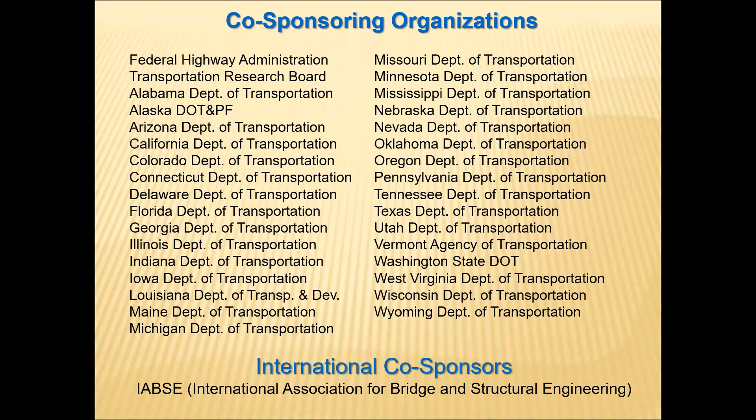We also have the IABSE as a co-sponsor of the conference. We are very delighted to tell you that we have two congressmen who are good friends of bridge engineering and very much involved with transportation, members of the committees on transportation. They're confirmed and will be with us, sharing their thoughts and making some remarks during the conference.

The welcoming group also includes Carmen Swanwick, the chair of the AASHTO SCOBS. And we are also delighted to have a speaker from US DOT, Firas Ibrahim, a very good bridge engineer himself, to provide us some of his thoughts on ABC and so on.

We also have several keynote talks with speakers from around the world, providing us an opportunity to learn from the latest developments in ABC in other countries. You can go to our website and see their names, titles, and affiliations. We have speakers from Switzerland, Sweden, China, Germany, England, and Holland.

We also have select keynote speakers chosen to provide not only to us in the US but also to the rest of the world, information on what we do in the area of ABC in the US. You see their names here; they don't need any introduction by me. There are 8 US keynote speakers in total, as you see here.

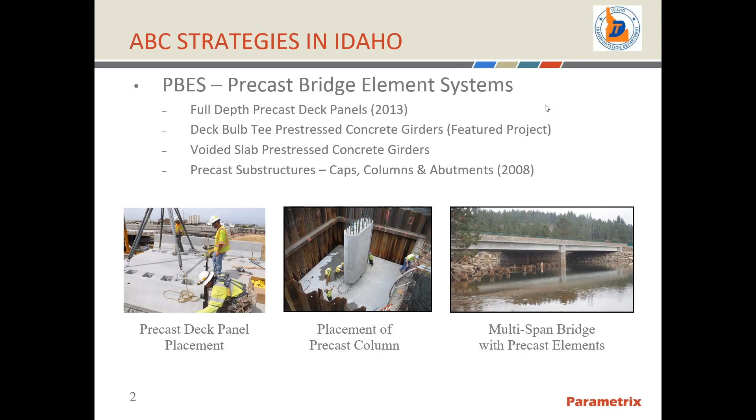In 2014, we did our first bridge slide. That was in a design-build contract, followed up with another bridge slide in 2020 on I-84, which was a design-bid-build contract.

Also in 2013, we utilized full depth deck panels. And finally, we recently piloted a project for construction with the use of steel I-girders with cast in place concrete deck in segments, and those were cast off site, and then we craned those into final position and connected them with closure pours.

In summary, Idaho has been using ABC concepts for about 50 projects that we have had underway. Idaho's use of ABC has been very positive, and we will continue to use ABC as a tool in our toolbox.

I'd like to introduce Shane Brown from Parametrix. Shane is going to talk about the State Highway 51 bridge over the Snake River. Shane's firm, Parametrix, and Shane were good enough to join us on the design of this project. And Shane, take it away.

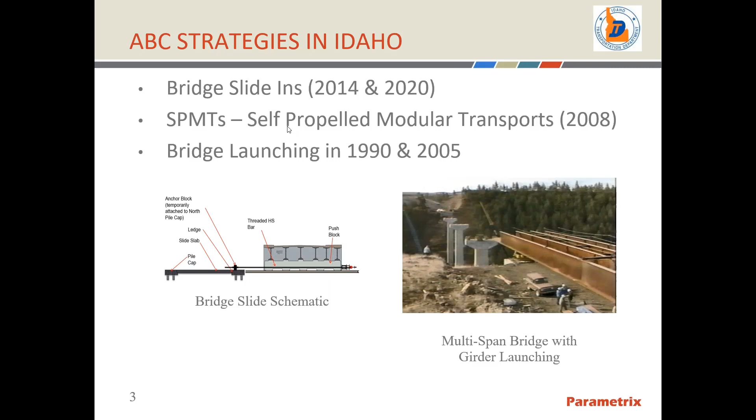Thank you very much, Matt. I'd also like to thank ABC and UTC for this opportunity to present our featured project for today. So today we're talking about the State Highway 51 over Snake River Bridge. I'll give you a description of the project, design challenges, the solutions to those challenges, some details on the superstructure design and substructure design, and then also what everybody likes to see, the construction.

Contributors for the project included the people you see here. ITD did the majority of the roadway civil design, and also did the early design and TS&L to select the type size bridge replacement we're talking about today. ITD hired Parametrix after they did the TS&L to complete the design and take it all the way through PS&E. American Geotechnics was the geotechnical engineer providing the foundation design. Forrester and Associates provided hydraulic and scour design. The contractor was Cannon Builders, and the precaster was Forterra. Lafarge Ductal provided the UHPC for the connections. Nucor and Skyline provided the steel pipe piles that we'll be talking about today. HLE was the contractor's engineer who did all of the construction engineering. Western States Rebar provided reinforcement, and of course FlexiFloat, which you'll see their product being used here, provided the barge used during construction.

The project was the typical design bid build project with 6 bidders. The low bid came in around 6.8 million, with the high bid coming in around 8.8 million. The contract was set up to have 299 calendar days to complete the work, with liquidated damages of 4,100 per day.

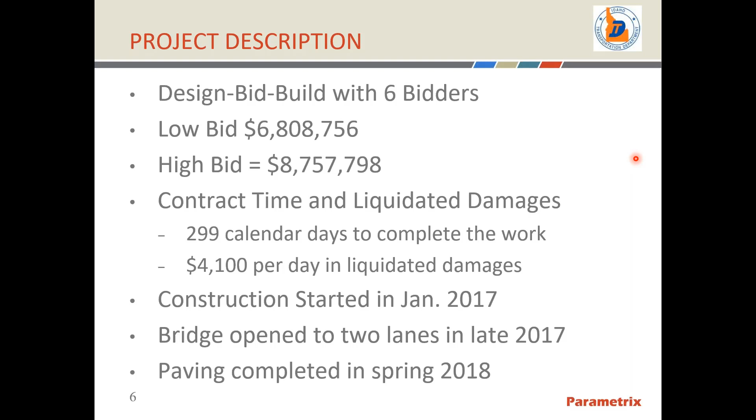Construction started in early January 2017. The bridge was opened to 2 lanes in late 2017, and paving was completed in spring of 2018.

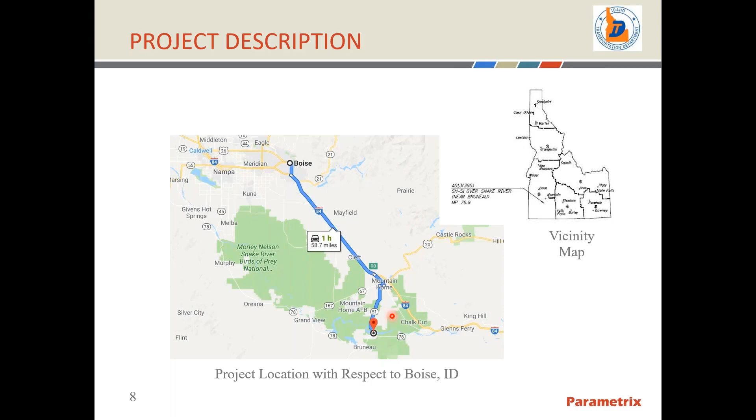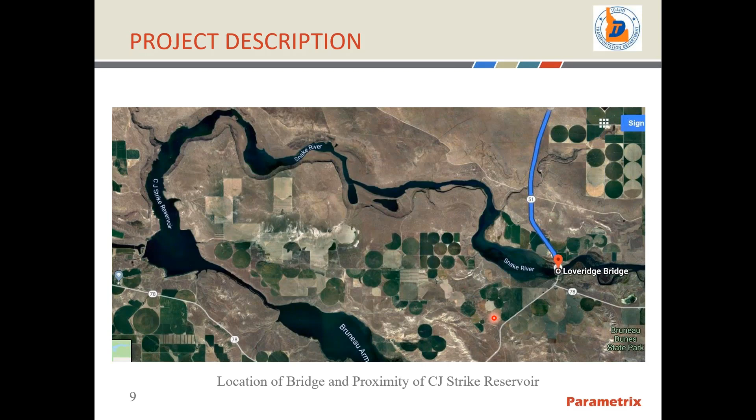In this photo, you can see State Highway 51 runs north-south across the river. This is the Snake River. There's a reservoir here, CJ Strike Reservoir, with the dam right here. The bridge is actually just in the eastern limits of the backwater from the reservoir. Also nearby is the Bruneau Dunes State Park, a great place for recreational people who like to play in dunes. And as you can see, lots of agriculture in the area. So State Highway 51 plays a valuable link, especially for agriculture, a lot of product that needs to get to market.

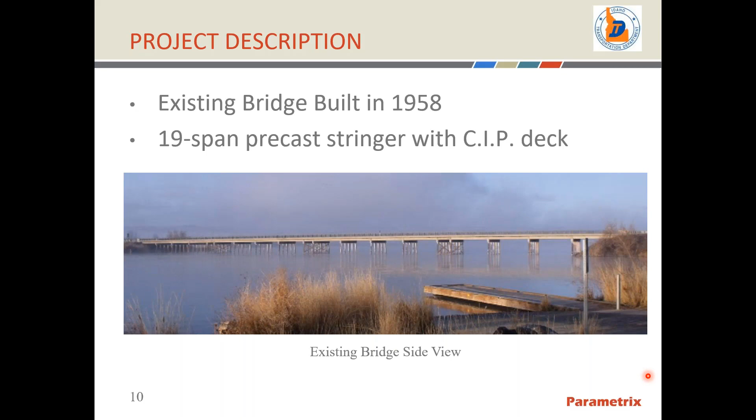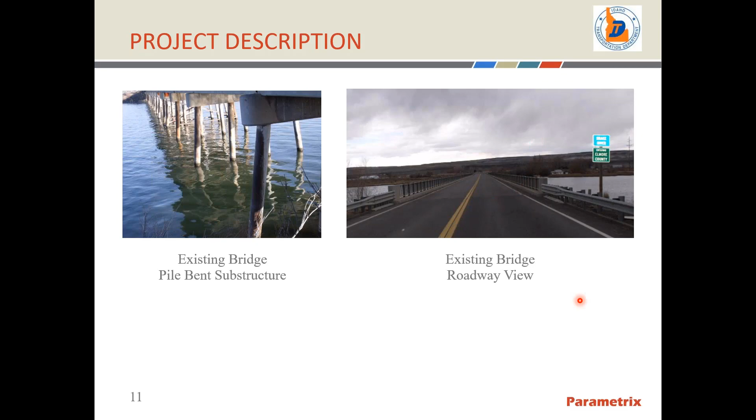So the existing bridge was built in 1958. It's a 19-span precast stringer with cast-in-place deck bridge. The substructure consisted of pile bent substructure type, 4 piles per bent with a cast-in-place cap. The deck itself was a two-lane bridge with minimal shoulders and substandard rails by today's standards.

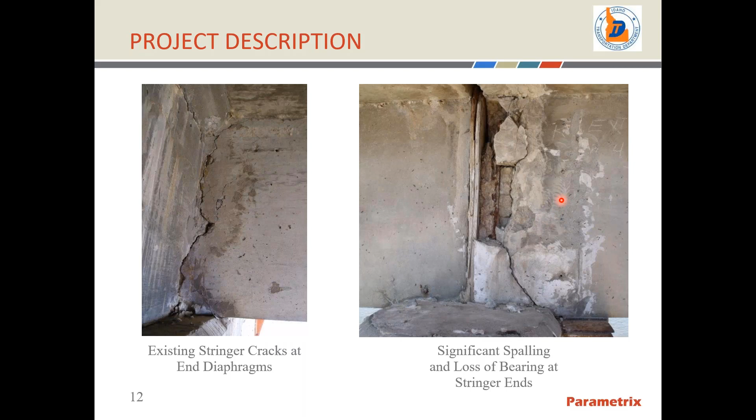But the real purpose for replacing the bridge was due to the issues you see here. On the left is a picture of the existing stringers. They were framed into cast-in-place end diaphragms, but unfortunately inspection reports identified in the early to mid 90s that significant cracking was starting to develop at the ends of these members. Lots of deterioration occurred over time, including significant spalling at the ends, which opened up opportunities for corrosion of the reinforcement inside the members.

ITD throughout the years had been working to extend the service life of the bridge by installing steel brackets to the face of the pile caps.

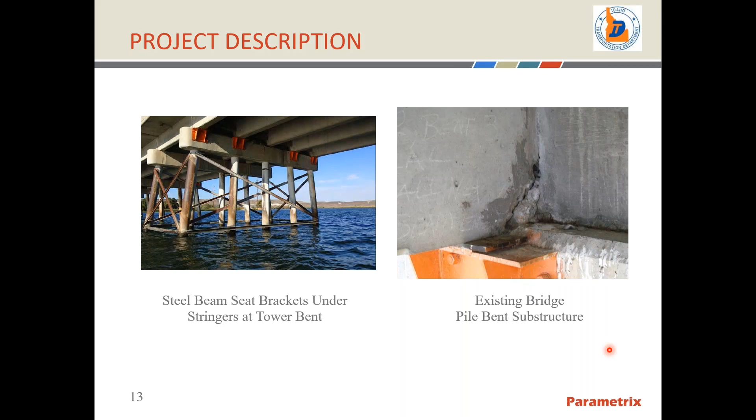On the left-hand side, you can see a location on the existing bridge where there's a tower bent, two bents side by side, and steel brackets that were installed to help extend the service life of the bridge. But recent inspections identified that even the steel brackets were starting to show signs of significant deformation, so ITD made the decision that it was time to go ahead and replace the bridge.

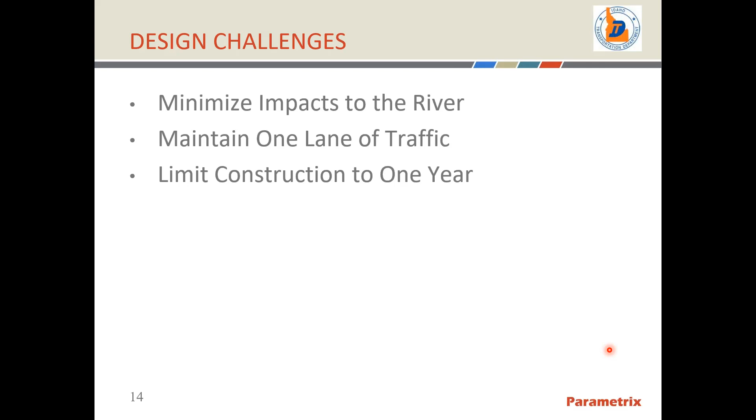Challenges with this bridge replacement: of course, we want to minimize impacts to the river. It was determined that we needed to maintain one lane of traffic at all times and limit construction to a year.

Minimizing impacts to the river - here in this Google image, you can see this is State Highway 51 right here. On either side of the highway, you can see the river and the wetlands associated with these types of crossings.

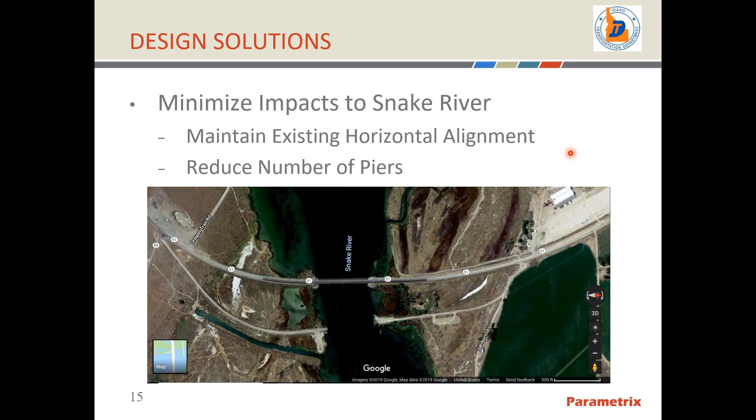The decision was made early on to avoid realigning State Highway 51 and to go ahead and utilize stage construction in order to maintain the same horizontal alignment. We also wanted to reduce the number of piers that were going to be installed in the river.

The bridge was built in three stages. First, stage 1, we built just part of the bridge. Then in stage 2, we shifted the traffic over a single lane. And then in stage 3, we connected them with the closure pour.

Traffic control was maintained with temporary signals at each end. Here's a picture of the temporary signals that we used. The traffic volume is not very high, which is why these single lane closures work like this. The one directional ADT was 575, with only about 6.7% trucks.

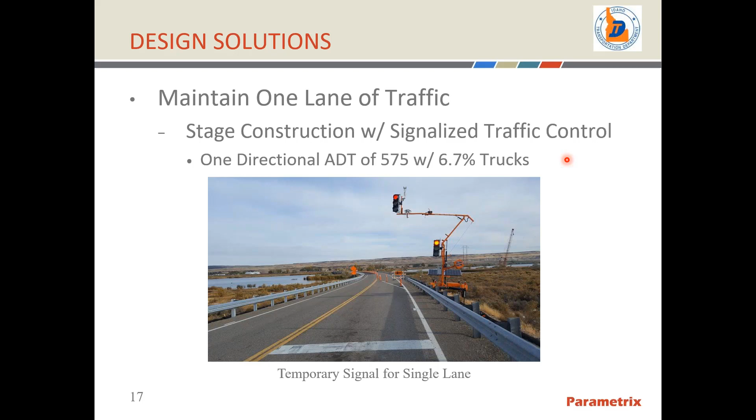To limit the construction to a single year, we looked at many options, but what we settled on was utilizing deck bulb T-girders with ultra high performance concrete, providing an asphalt overlay with a spray applied waterproofing membrane, and for the rail, using a two-tube curb mount rail.

Here in the picture, you can see the deck bulb Ts. These deck bulb Ts were connected with ultra high performance concrete between each girder. The overlay shown here varied from 7 inches at the abutments and piers to just a little over 2 and a quarter inches minimum at midspan. And here's the two-tube curb mount rail.

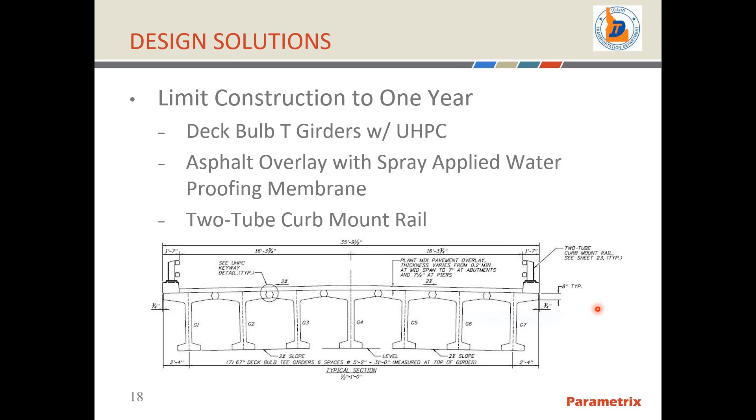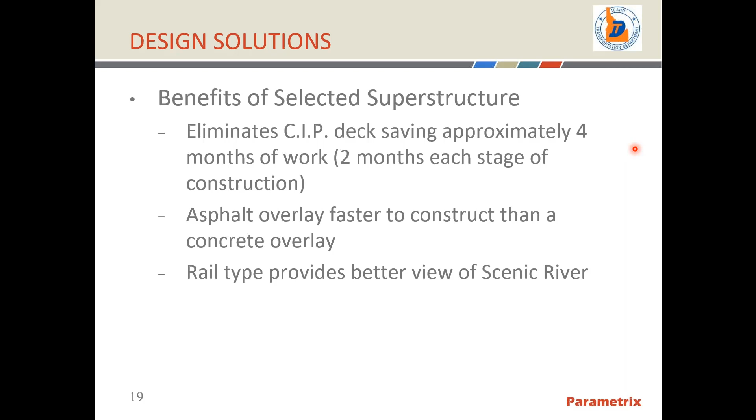Benefits of the selected superstructure were really that it eliminated the cast-in-place deck, saving approximately 4 months of work, about 2 months for each stage of construction. The asphalt overlay was also faster to construct than a concrete overlay, and the rail type provides a better view of the scenic river.

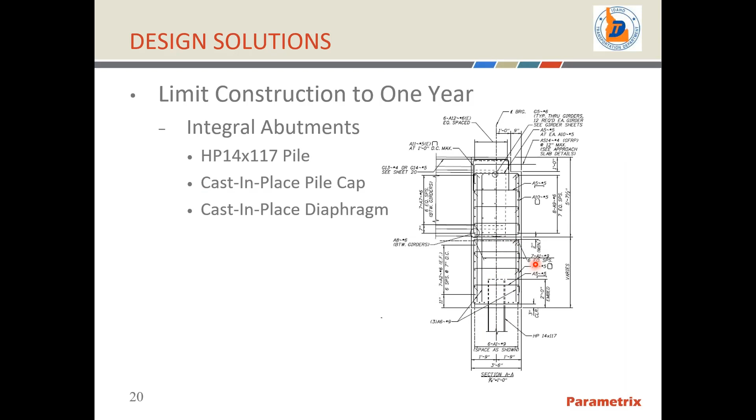Benefits of the selected substructure included a significant reduction in in-water work time. We didn't have coffer dams or drilled shafts, no pile groups with a cast in place pile cap to construct, and no cast in place or precast columns to construct. It also reduced environmental impacts to the river, had higher reliability to the capacity of the steel piles with the use of pile dynamic testing, and ultimately we provided a jointless bridge deck, reducing maintenance costs in the long run.

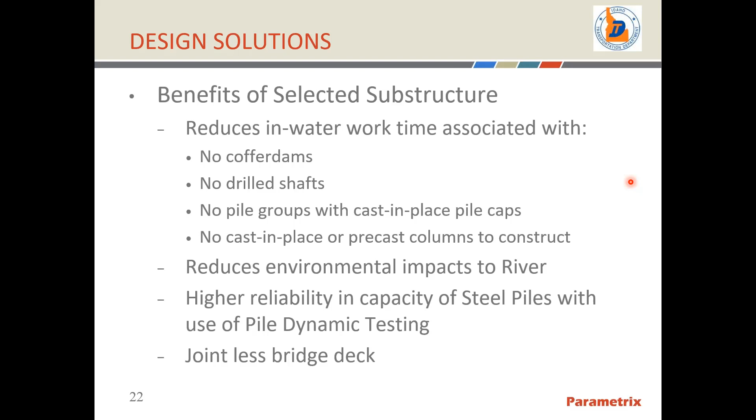More specifically about the superstructure design, the precast girders themselves were connected with ultra high performance concrete. For most of us who've been listening to these webinars in the past, we've heard about ultra high performance concrete. There may be some who have not heard about it, might be new to bridge engineering, so I'll talk a little bit about it. All the design was completed using this tech note, Design and Construction of Field Cast Ultra High Performance Concrete Connections.

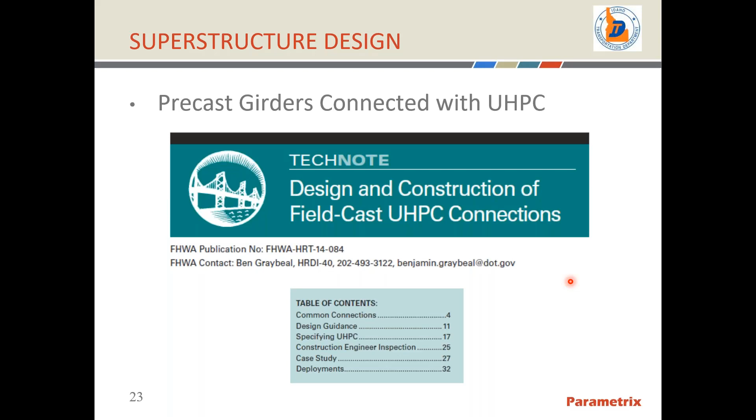It's an FHWA publication, the publication number is provided, and FHWA's contact is Ben Graybeal, who really authored this publication. He's a great resource if anyone's interested in learning more. I highly recommend you pick up this tech note and read through it, and if you have questions, give Ben a call. I personally called him twice during the design of this project just to confirm the information in here and make sure I was applying things correctly.

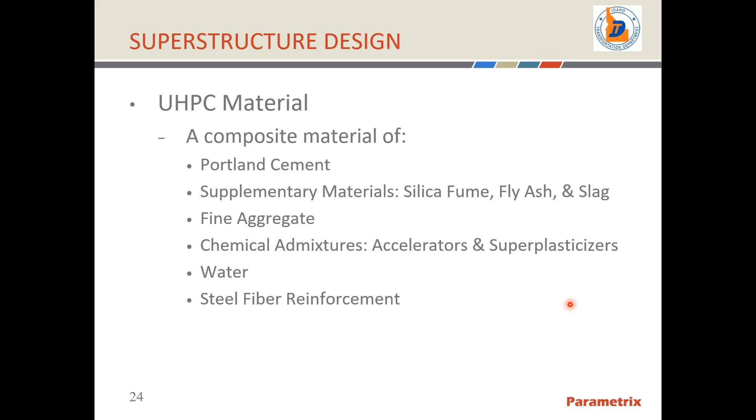Ultra high performance concrete is really a composite material. It includes Portland cement and supplementary materials like silica fume, fly ash, or slag. It uses fine aggregate, not coarse aggregate, and has chemical admixtures like accelerators and superplasticizers. Of course it uses water, and another key ingredient is the steel fiber reinforcement, typically about 2% by volume, consisting of half-inch steel fibers about 8/1000ths of an inch in diameter.

So why did we elect to use ultra high performance concrete for the girder flange connection on this project? Well, it has high tensile strength. It's self-consolidating, so it's easy to flow into the keyways and around the reinforcement. It bonds well to precast surfaces when prepped accordingly. It has high durability and low porosity, which is good for our freeze-thaw conditions. And it has a short development and lap splice length, which is really beneficial.

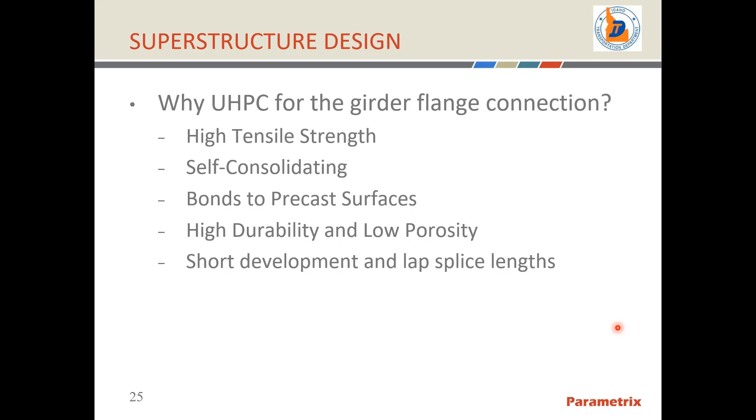The reinforcement lap splice information for UHPC and development length is provided here. Depending on your cover requirements, your development length is anywhere between 8 and 10 bar diameters. The more unusual piece, I think, when people first start working with this is that the lap splice length is only 75% of the bar development length. For us in bridge engineering, or concrete design generally, that's unusual to hear - that lap splice length is shorter than development length. What we typically see using regular reinforcement and regular concrete is a lap splice length about 30% longer than the development length in today's codes.

So this was one area where I contacted Ben Graybeal for clarification, to make sure I was understanding the tech note correctly. Ben assured me I was interpreting it correctly, that there's been plenty of research showing that the bars, when tested, actually break inside the precast and not inside the ultra high performance concrete. He's got lots of data to support these recommendations, so we followed them.

For our particular project, we connected our girders together at the keyways using a 6-inch wide keyway that accommodated a 4-inch non-contact lap splice. All of the reinforcement in the flange was epoxy coated reinforcement. The top mat were number 5 bars and the bottom mat were number 4 bars.

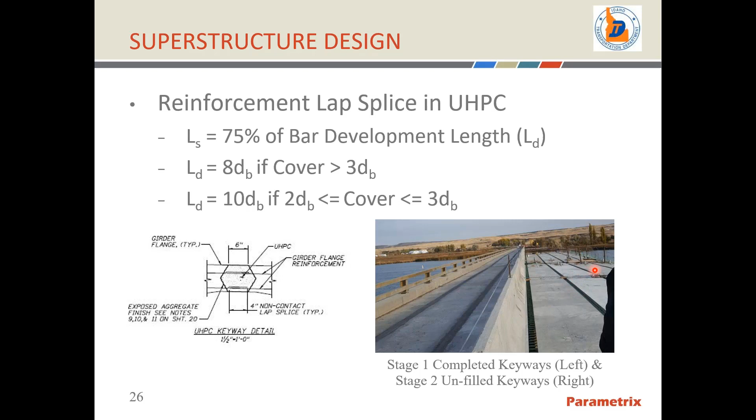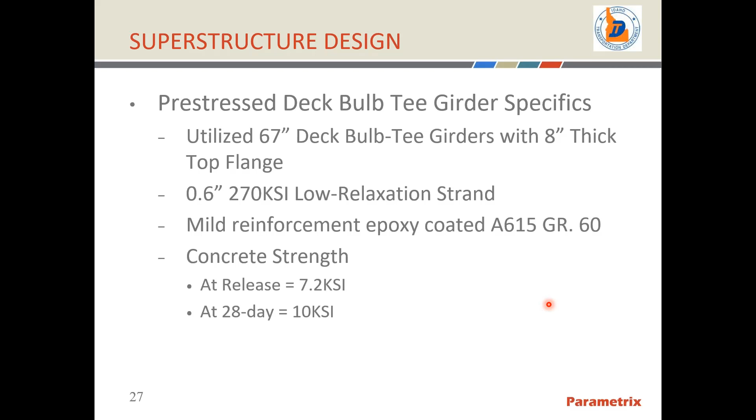More specifically about the prestressed deck bulb T-girder design, we utilized 67-inch deep deck bulb T-girders with an 8-inch thick top flange. It used 0.6-inch 270 KSI low relaxation strand. All other reinforcement was A615 grade 60, and the concrete at release was 7.2 KSI, and at 28 days 10 KSI.

The girders were designed as simple span beams with mild reinforcement in the top flange to control cracking at the piers. Dead loads were applied prior to the UHPC keyways, distributed based on tributary area to the girders - basically anything that would be on a conventional non-composite or composite deck girder system; anything non-composite went tributary to the girders.

Similarly, we treated all loads that were applied after the UHPC keyway was installed and cured. We distributed all dead loads equally to the girders.

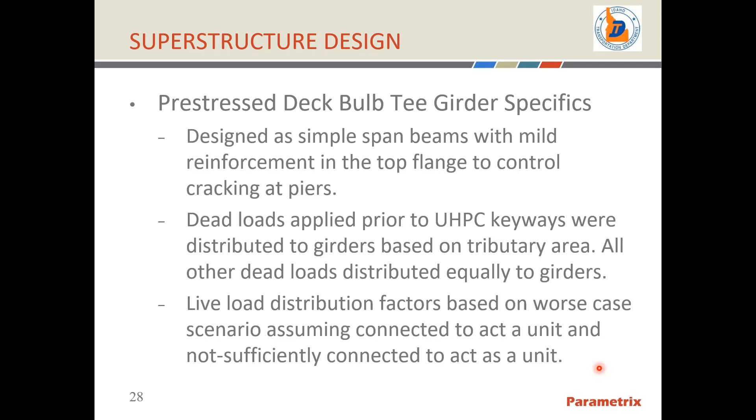Our live load distribution factors were tricky because this is a new technology that isn't specifically addressed in the AASHTO LRFD bridge design specifications regarding what live load distribution factor to use. So we elected to use the worst case scenario, assuming the girders are connected to act as a unit, and also assuming they're not sufficiently connected to act as a unit, so we could bracket the range of possibility and make sure we're not light anywhere.

More specifically about the connection over the piers, the reinforcement was really designed to control cracking over the piers. Our top flange reinforcement consisted of number 7s in the top and bottom mat of the girder. These number 7s from left and right side of the pier were staggered to avoid each other and have a non-contact lap splice right over the pier.

The reinforcement was designed to control cracking over the pier, so it was checked for the service 1 limit state and not the strength limit state. The girders were designed as simply supported for the strength limit state and service limit state, but also checked at the service limit state to control cracking over the pier.

Location of the bents was also a critical feature for this. The existing bridge was composed of 19 spans, but 3 of those spans are really short spans in these locations that actually produce what's called a tower bent. At least that's how it's identified in the existing plans.

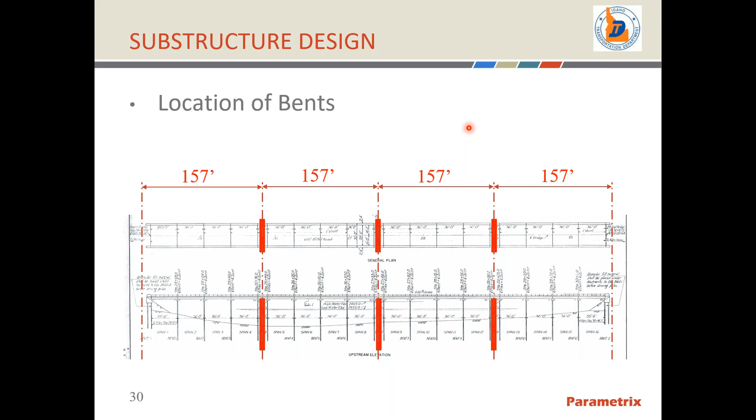The tower bent with those short spans became an ideal location to place our new piers, shown in red. So the piers were spaced right between those tower bents, with the thought that the contractor could use the existing bridge to mobilize out on, drive his pile, remove that short span, then drive his pile and work back off the bridge deck. That's exactly what the contractor elected to do during construction.

Another benefit about selecting this location and making use of the tower bents is the contractor was able to use a steel template to make sure he had the correct alignment for his piles while driving through this water column and down into the stream bed mud. So the contractor made great use of the existing bridge to facilitate his tolerances and placement of the piles.

More about the pier bent piles themselves. For the foundation, it was decided, working with American Geotechnics, the geotechnical engineer, to use 36-inch pipe piles.

It's really called a composite pile with respect to the geotechnical world, at least what I learned for the first time on this project, because it's driven as an open-ended pile in the beginning. So the pile at the tip has no closure plate. It was driven open-ended for the first 55 or 60 feet, depending on what pier you're at.

Then a closure plate was installed in the pile. This closure plate, once it came in contact with the pile, forced a situation where the pile was then plugged and you had an end-bearing pile. They call it a composite pile in the geotechnical world because it's first driven open-ended and then forced to have a plug. I thought that was an interesting thing I learned from the geotech on this project.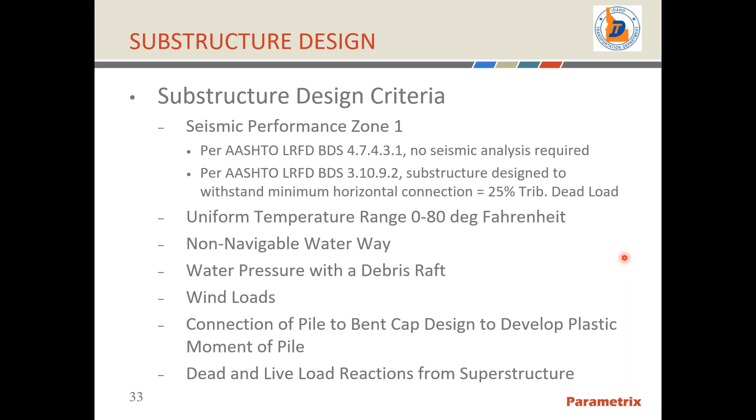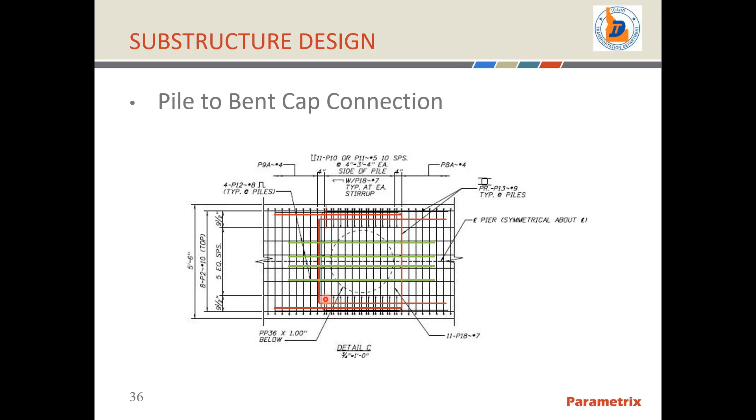So beyond design, let's talk a little bit about the construction. The contractor started with stage 1 construction, demoing out the short tower span, and then demoing out part of the bridge itself. He worked with 2 cranes, as you can see in this picture. On the right-hand side, the contractor's crane is mobilized with this hammer and he's actually driving pile. On the left-hand side, you can see a pile sticking up in the air.

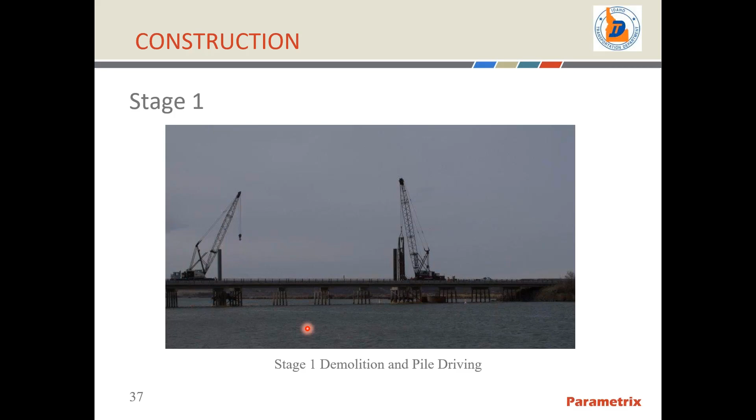And waiting to be driven down. So the contractor worked back and forth this way on the existing bridge while traffic was on the other side of the bridge during stage 1.

Here's another picture of the pile driving that was done by the contractor. As you can see here, that this beam right here, there's actually a steel bracket here.

As we mentioned, the bridge was being replaced because there was some deterioration at the ends of the beams that were causing issues with bearing at the ends of the beams. So as part of the construction, we required the contractor, if he mobilized construction equipment out there, to provide design calculations that show that the beam can handle it with the existing brackets that are out there that were supporting the beams, since construction loads are often heavier than highway loads.

And during design, we did do a load rating of the bridge to verify that the stage 1 situation with reduced number of stringers was satisfied with the additional weight of the temporary barrier that was installed. The load rating was acceptable for the bridge for highway loads, but for construction loads being much higher, it was not acceptable.

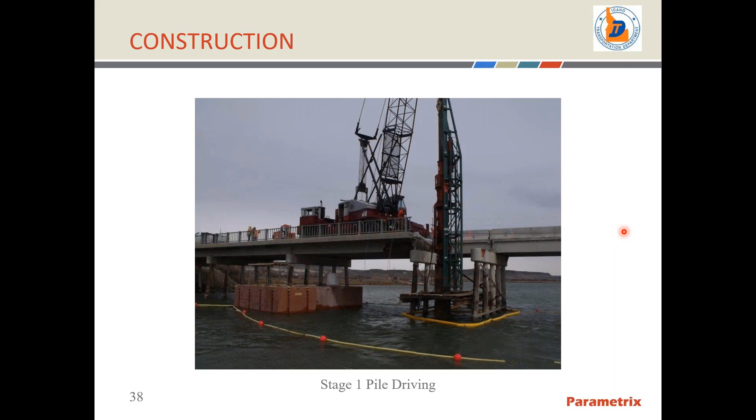So the contractor had to do a little extra work to design this little bracket, and he applied those anywhere where there was signs of deterioration on the bridge where these brackets were installed by ITD to help extend the service life of the bridge. So it worked very well, actually, and it made it possible for the contractor to take use of the existing bridge for construction for driving these piles.

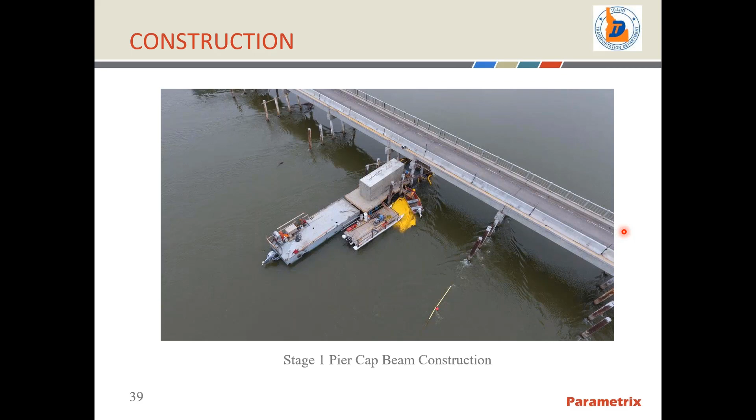Here's a picture again of stage 1 construction showing the cast in place cap is complete after the pile driving was done. And you can see dowels sticking out to make that connection to the superstructure.

Here in this picture, you can see that after the pier caps are done and the abutment was complete at the ends here, the contractor went ahead and mobilized his crane out onto a barge. In fact, all construction was performed for this bridge working off of barges for the contractor. No temporary structures like a temporary platform with piles driven into the river was utilized. All work was performed off of barges.

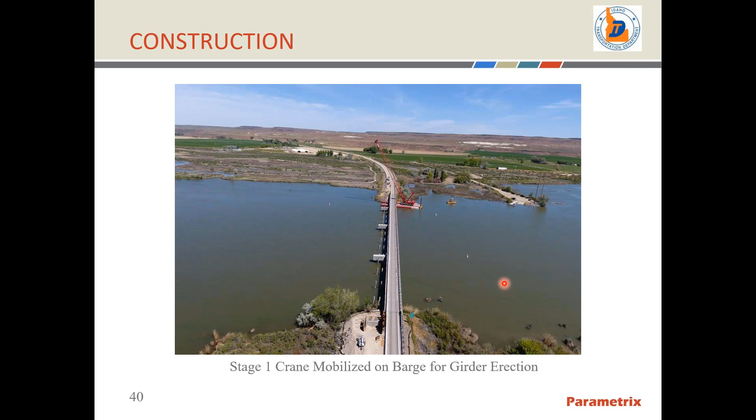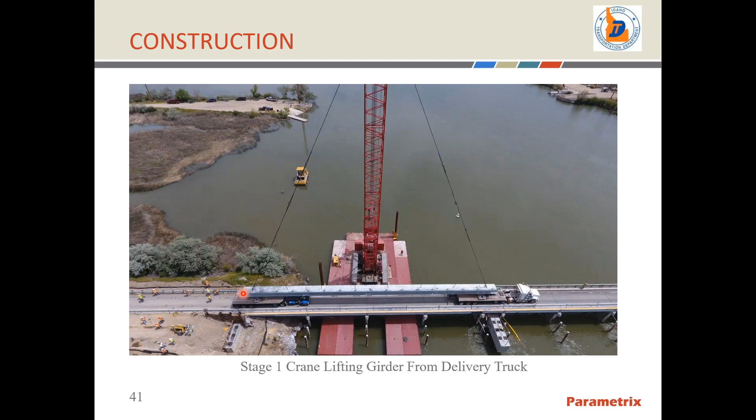So the contractor, when he was ready to erect his girders, went ahead and mobilized his crane in, as you see here in the picture. And then the truck comes in, he goes ahead and connects his crane leads up to the pick points on the girder, a single crane to pick this large girder. And then he just started to proceed with the girder erection, as you see here.

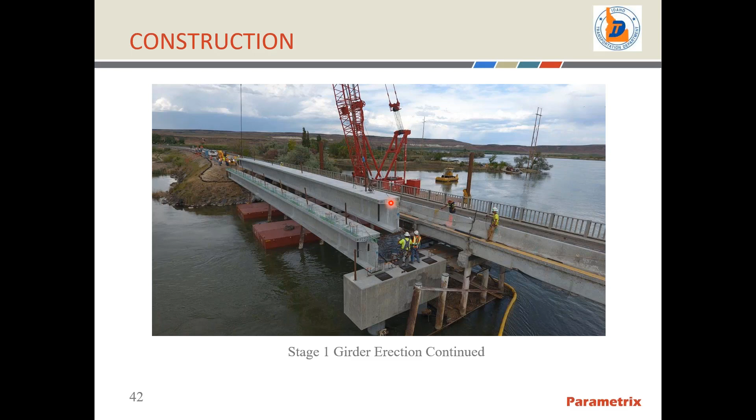So what you see here is stage 1. First girder is erected, the exterior girder. Now this first interior girder is coming to land on the bearing pad.

Once the girders were erected, the contractor was ready to start installing the ultra high performance concrete. Here's a picture of the equipment that was used to place the ultra high performance concrete. All batching of this material was done on site.

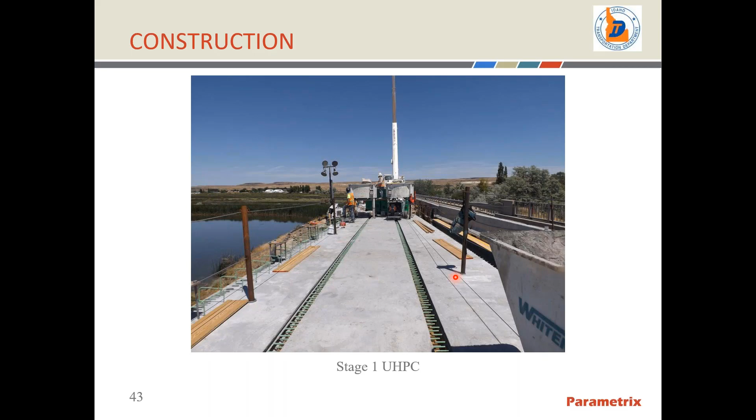Here's some more pictures about the UHPC placement. In order to place this material, the contractor has to form on the bottom side, but he also has to put a form on the top side because this material is so flowable with the superplasticizers and additives in it that once it starts flowing, it flows really well. In fact, it actually flows up and out of the form, especially in low spots.

So pre-stressed girders tend to camber up, and so at the ends of the girders would be the low spots, and this material really would start to flow out of it. Plus, the specifications for the project really required that the UHPC flow about a quarter of an inch up out of the joint, and then the contractor has to grind the joint flush with the deck after it's cured.

So in this picture, you see the crews installing the forms across the top over that. And then in this picture, you can see the material flowing as being placed.

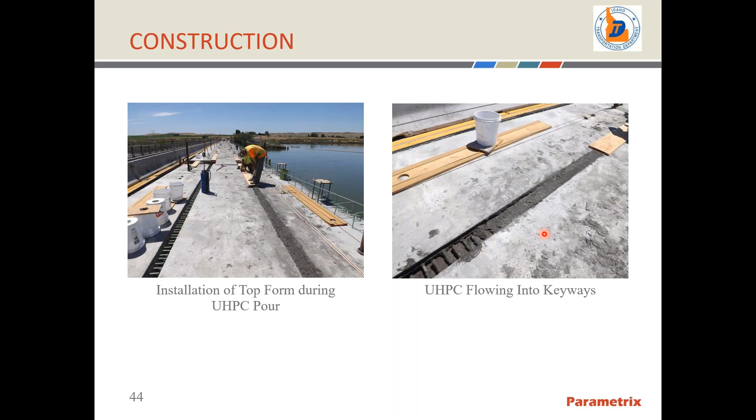The apparatus used for pouring the UHPC was pretty simple. They referred to it as the bucket on site. So pretty easy to place the material. They mix it and place it in here, and it just makes sure it flows directly into the keyway. You can also see in the picture, again, the epoxy coated reinforcement.

The prepped keyway might be hard to see, but there is an exposed aggregate finish on the keyway, and the material's flowing. They need to get some more in here soon, though.

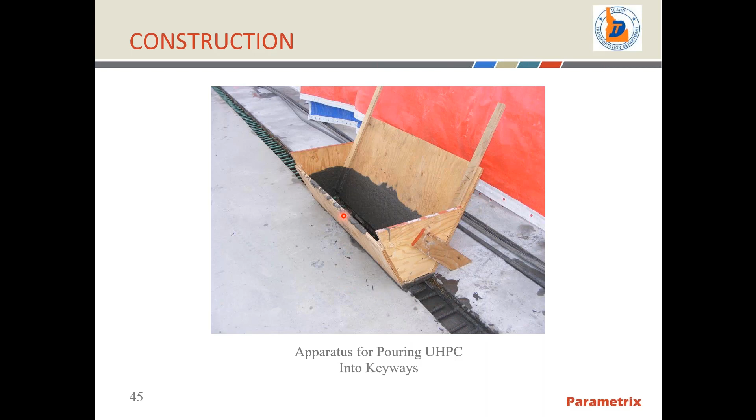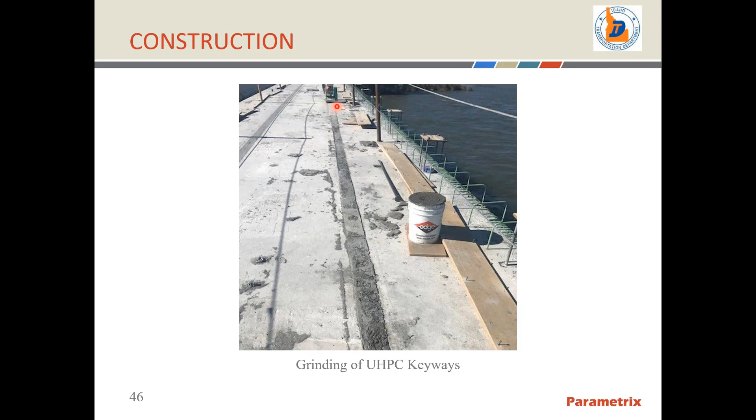After the keyways were poured, the contractor then had to grind the keyways, as I mentioned before. So what you see here on the left-hand side is this keyway has already been grinded, so it's flush with the adjacent girder flanges. And this keyway grinding is taking place as we see right here.

So stage 1 is complete in this picture here. On the left-hand side, there's the 2-tube curb mount rail, of course the keyways, and then of course the girders and the temporary barrier. On the right-hand side in the picture, you see stage 2 construction in progress.

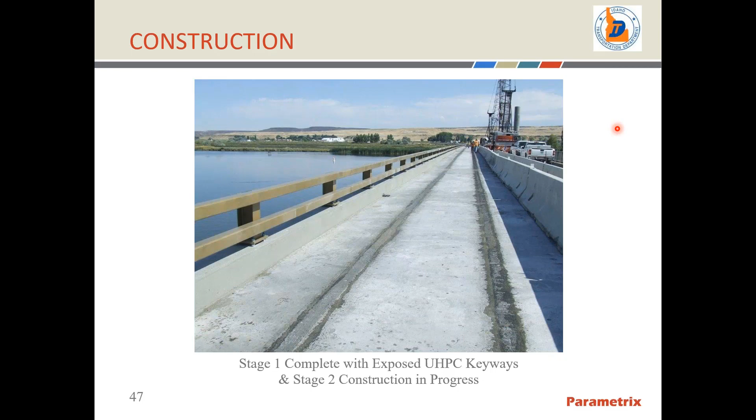The contractor's got his dual cranes out there. He's got equipment out there. You can see a pile up in the air right here as he's working to drive his pile and demo out the bridge, working back from center.

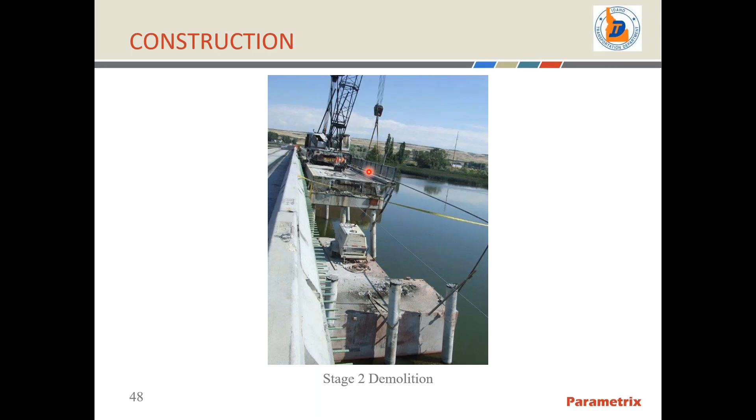Here's a picture of stage 2 demolition, the contractor's crane on the existing bridge picking the rail right now. Again, work being done off barges.

And then stage 2 construction really proceeded along the same lines as stage 1: drive your piles, construct your caps, place your girders, and do your intermediate diaphragms, and then do your UHPC keyways.

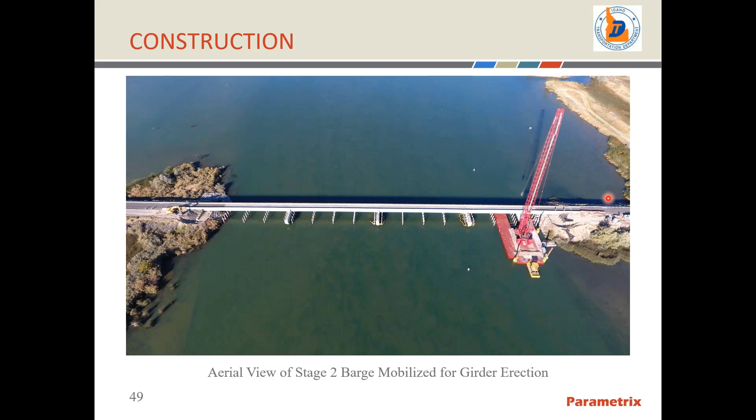So here you see an aerial view of stage 2 with the barge mobilized and ready for the girder erection already. Stage 2 girder erection proceeding.

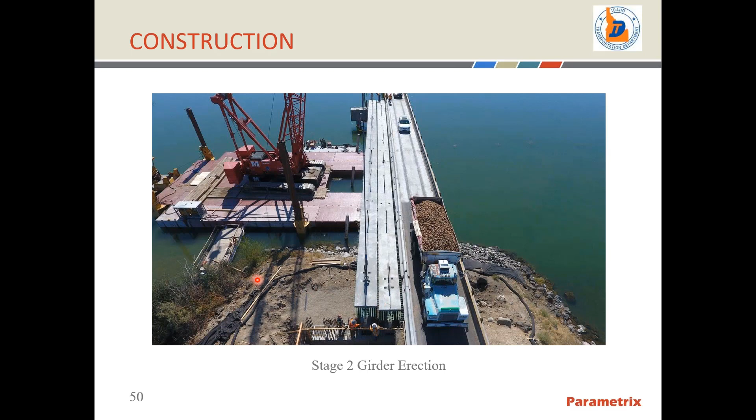As I mentioned, lots of agricultural product comes out of the region here. So you see, I believe these are Idaho's famous potatoes crossing the bridge. And of course, the first 2 girder lines are installed and crews sitting there waiting to make sure that the girders land on the bearings correctly.

Some of the key things about these ultra high performance concrete keyways here, because there's tight tolerances on the lap splice length, we're only asking for a 4-inch lap splice length, but you have to have good control over tolerances. And these pre-stress girders naturally have a sweep in them, and the tolerable sweep is usually around 1/8 of an inch per 10 feet.

Now these girder span lengths were around 157 feet, so you're talking almost 2 inches of sweep that could have been allowed in a girder per tolerance from PCI. But that wouldn't have been acceptable with these keyways, because these keyways are only 6 inches wide, and we have a non-contact lap splice of 4 inches.

So the contract plans actually required the contractor to provide a method to correct girder sweep. In addition, the contract plans also required the contractor to provide a method to correct differential camber between the girders, especially since these keyways are going to be grinded flush with the adjacent girder flanges after they're poured with the UHPC keyway. We wanted to make sure everything was leveled up transversely and everything was spaced accordingly for the keyways to get the required non-contact lap of 4 inches for the reinforcement.

So the contractor utilized a come-along system to correct the girder sweep, and some wood spacers that were cut to be 6 inches wide, so that when he pulled the girders together with the come-along, he made sure that he didn't go too much, and he came right to the exact spacing of 6 inches. The system worked really well. I was really happy with it.

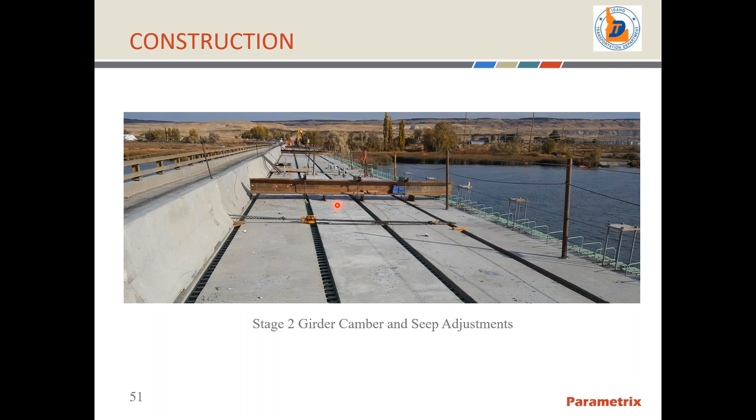To correct the girder camber, the contractor utilized some strong backs, some steel beams on the top and bottom below the beams, and just some simple tie rods to go through the girder flange, between the keyways here, between the girder flanges, and then he just tightened those up so that he could suck the girders together and come in alignment.

So the bridge is complete. This is a picture of a side view from the north bank.

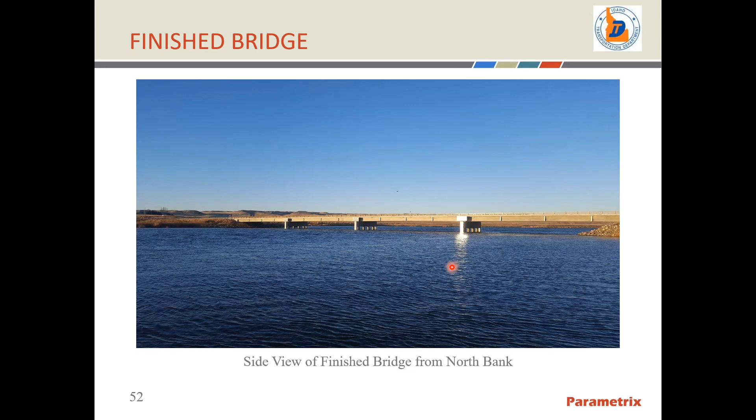As you can see here, all the existing piles have been removed. It's a nice 4-span bridge that's been opened up for the boaters. One might ask, what are these things on the ends of the bridge here, on the ends of the piers? Well, they're actually vertical gauge signs.

They inform the boaters of the low clearance underneath the bridge. This project was a little unique because we typically have to raise the profile of bridges to provide vertical clearance, but because this river is a non-navigable river, there was no vertical clearance requirement. However, it is a boater friendly site, and a lot of boaters come out here to enjoy the facility. So there was a small profile shift, and also a small drop in the vertical clearance compared to the existing bridge. Not significant, but enough that the Coast Guard still wanted us to sign the bridge for the vertical clearance to inform boaters of the low chord clearance underneath the bridge.

Some lessons learned: one of the things that happened during construction was forms needed to be secured tightly. There was one instance where material blew out, but it got corrected quickly. You need to keep good head pressure on the bucket to ensure full placement of the UHPC in the keyway. There was a place where it ended up being a little low and didn't reach the quarter inch over the top of the flange.

Experience helps to ensure a timely execution of work. This is a new construction method being used. It's not brand new, but it's new to many of the contractors, so there's always a learning curve. And of course, the UHPC material actually costs money, so you want to detail it to minimize how much you're using, which is why we focused a lot on the width of the keyways.

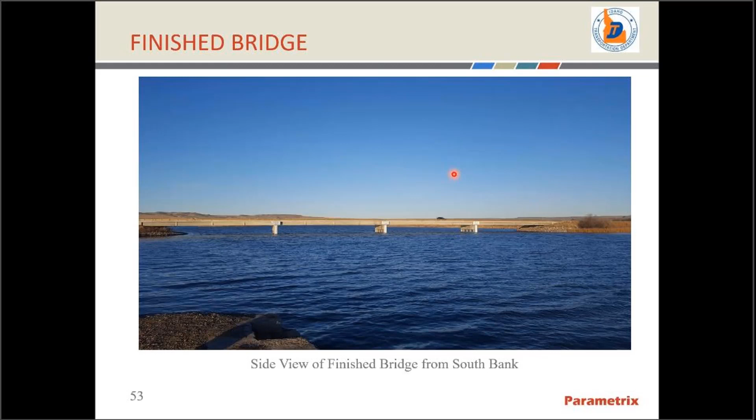In the stage construction, for stage one, three girders were carrying the live load. The reason we shifted the traffic a third time is because we wanted to minimize the vibrations. What we did was require the contractor to install the intermediate diaphragms between the girders, which we didn't talk about much in the presentation.

After they erected the girders, they did the girder camber equalization and corrected for the sweep, then the contractor installed the permanent intermediate diaphragms between all the girders. That helped lock the girders in. He then poured his keyway and shifted traffic over. We were trying to get as many girders as possible participating so we don't have as much differential vibration between the two stages. That was the best we could really do.

Leave that slide up. There were some questions about the overhang: how was it designed, and is the barrier wall integral with the exterior beam with the TL rating?

This is a 2-tube curb mount rail. The overhang for the girder was designed to accommodate, since it's a 2-tube curb mount rail, the full plastic moment of the post itself, and the lateral load applied at the top rail in accordance with the AASHTO LRFD bridge design specifications. So the reinforcement was designed pretty much just like your regular conventional overhang for these girders.

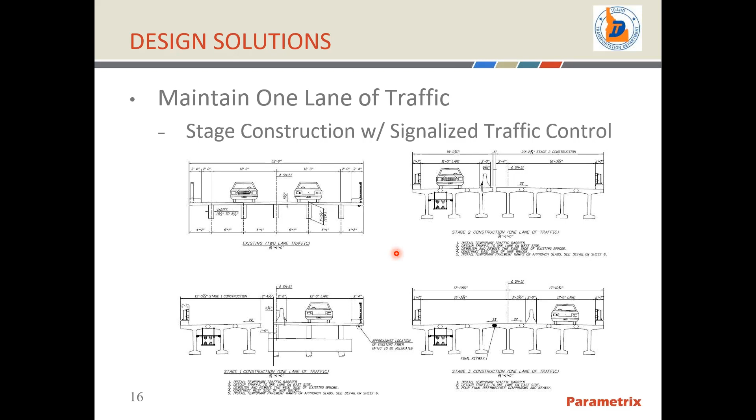There was a question that came in beforehand, I think slide 29, about the details of the girder and deck longitudinal connections over the piers. You discussed this pretty thoroughly already. I think you covered this one pretty good.

The next question: how did the contractor attach the form tops to the deck to protect flow out of the UHPC? I'd have to get back to that one and pull open the submittals. I don't remember the exact method he used.

Shane, typically at the bottom of the top slab of the deck bulb T, we have the precaster put inserts in to attach the plywood form on the bottom, and that's a similar attachment we have for the top form as well.

We've got a few questions here on piling. The first one: what was the average depth of the river channel at the bridge? As far as the water depth was going, it was about 15 to 20 feet.

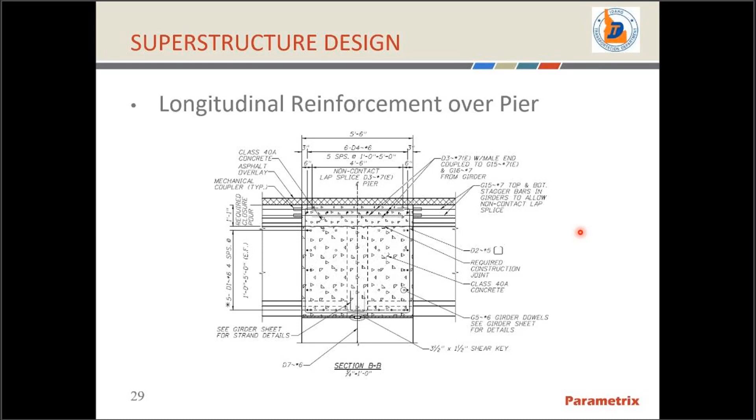How were the piles in the splash zone protected from corrosion? Was that on the inside too? No, it was only on the outside.

They asked beforehand: can you provide information on the design and construction of the pile bents, and were there any considerations for long-term corrosion? I think you've covered that pretty well in your description of the pile and the zinc protection, so we'll move on.

Another question on the piles: could you discuss the choice of steel versus pre-stressed piles in the bents? Were there any subsurface obstructions that required pre-boring or exploration? No, there was nothing below the surface anticipated that would require pre-boring to install piles. No real consideration was given to pre-stressed piles.

Matt, correct me if I'm wrong, but pre-stressed piles aren't typically used in Idaho. I'm not even sure the local fabricators have the ability to fabricate those. Is that correct? Yes, that's correct, we don't have experience using precast piles in Idaho.

A couple of construction questions came in beforehand. Can you discuss the delivery time and temperatures for ultra high performance concrete, and was the UHPC batched on site? The UHPC was batched on site. What the temperature was on the days it was placed, I don't know, I don't have those records. But there is a requirement that if you have cold weather, you still have to treat it like cold weather concreting.

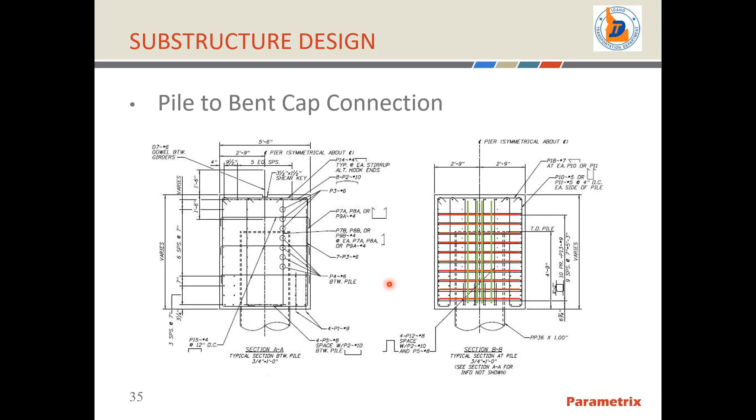Thanks. There was a question related to the leveling correction: did you check the stresses that were induced because of the deflection? So the equalization of the girder cambers, the stress is historically those don't get checked in Idaho. Those typically are assumed that once the system is all connected and composite, it kind of counterbalances each other out and they act as a unit anyways. Matt, if I've said anything wrong here, please weigh in. But specifically on this project, we didn't do stress checks for the camber equalization. Well, it's a good question, and we have checked those in the past and made sure that we weren't exceeding any kind of tensile cracking stress when we do that.

Okay, there was a question about the pre-stressing strands. Were they epoxy coated? No, they were not.

How long were the pipe piles? So embedded below the stream bed, they were about 55 to 60 feet, and then you got another 30 some feet above that. So yeah, they're about 70 feet. Oh sorry, 60 feet in, and then another 30 feet above that. So you have about 90 feet total length.

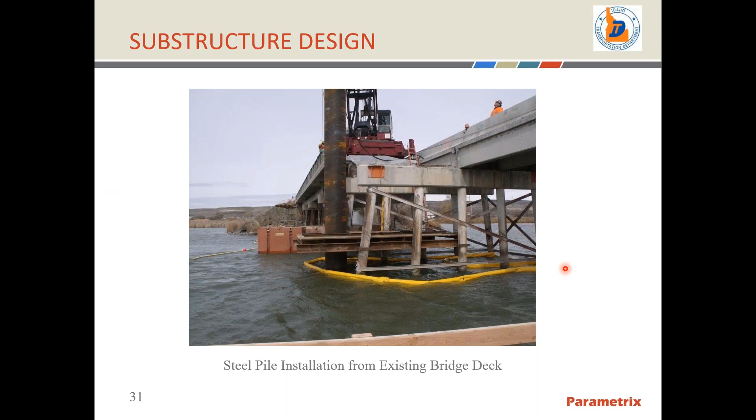Okay, there's a question about welding the top plate to the top of the 36-inch piles. Is that a common detail in Idaho, for the structural engineer or the geotechnical engineers? It's common to me. I've used it many times when I'm trying to reduce the weight of pile, if your foundations are limited for axial capacity. There's a top plate with a little fillet weld around the top. The top plate was actually reduced to be 1 inch less than the outside diameter of the pile itself, so that you had a fillet weld right there. This plate doesn't really do much except stop concrete from filling into the pile and make sure it transfers bearing load on top of the pile to the pile. Laterally there's really no load to the weld.

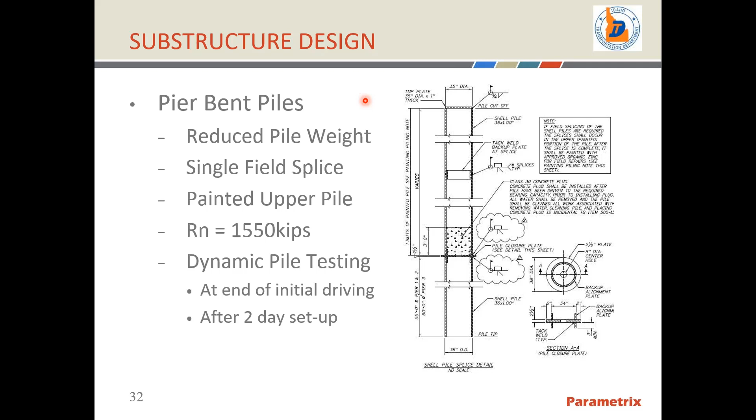What design case controlled the bent cap design? Specifically about the bent cap itself, of course we checked for the dead and live load on the bent cap. So strength limit states control, but we also imposed those plastic moments from the pile to make sure that the reinforcement in the cap was adequate to take and transfer that load from the pile into the concrete also. So which one controlled? Vertically, the strength limit state did, but laterally, that plastic moment on the piles controlled.